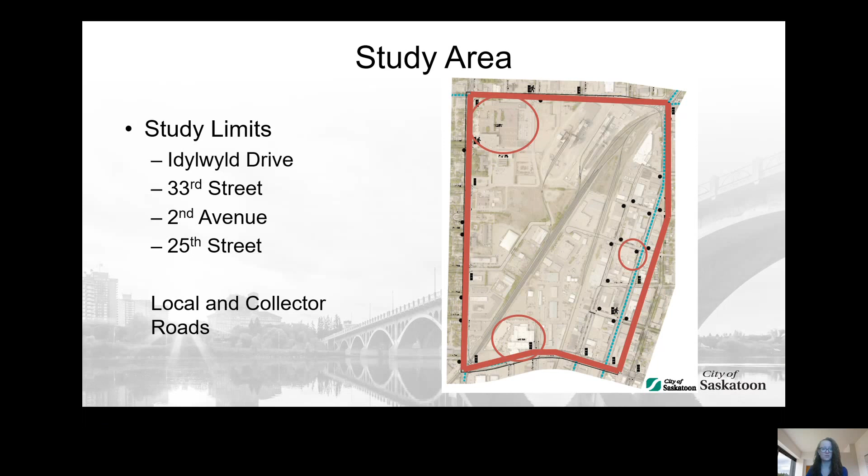In terms of our progress within the Neighborhood Traffic Review process, we have already completed stages 1 and 2, which involved identifying traffic problems within the neighborhood, collecting data, and developing a plan to address those problems. We are now in stage 3 of the schedule, which involves presenting our proposed solutions to the public in the form of a draft traffic plan.

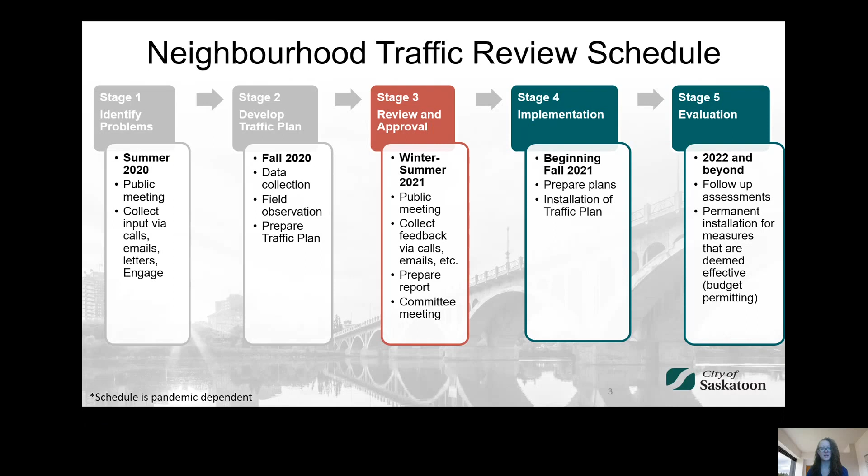This involves collecting feedback on that draft traffic plan, making any necessary changes or adjustments to the plan, preparing a report with the final traffic plan, and presenting the report to the Standing Policy Committee on Transportation. We anticipate that this stage of the schedule will be completed in the summer of 2021. I'll discuss the next steps in the schedule later in the presentation.

I'd now like to go over the concerns that we heard for this neighborhood. We heard concerns over the safety of pedestrian crossings at 1st Avenue and 26th Street, 2nd Avenue and King Street, 3rd Avenue and Duke Street, and 2nd Avenue and Princess Street.

We also heard some concerns regarding lowering the time restriction on street parking from 3 hours to 2 hours on the 700 block of 1st Avenue. Time restriction adjustments require a review of parking supply and demand. This request has been referred to Parking Services for their consideration.

After gathering all of these concerns from residents, we began our data collection program. Throughout the data collection process, we performed a number of site visits to gather field observations of pedestrian activity and traffic patterns, conducted pedestrian counts at 4 intersections in the neighborhood, and analyzed collision data for the neighborhood.

We used the results of our data collection program to create a draft traffic plan that recommends a number of changes and improvements within the neighborhood. In the next few slides, I will go over each of the recommendations in detail, but in general, we're proposing pedestrian safety improvements such as active pedestrian corridor, pedestrian activated signal, and sidewalks.

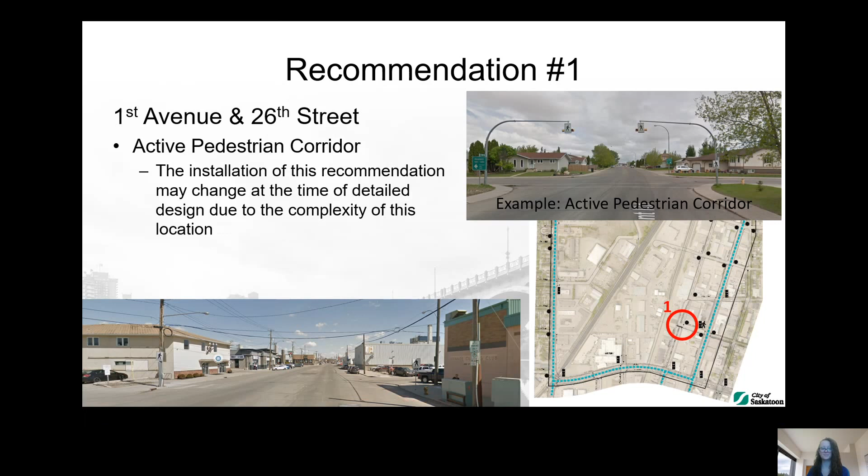The pedestrian crossings along 2nd Avenue/3rd Avenue were reviewed in a holistic way to ensure that the most used crossings were improved. Studies were conducted along 2nd Avenue/3rd Avenue at the intersections with Duke Street, Princess Street, and King Street. After reviewing the data, the following recommendations were made.

An active pedestrian corridor is recommended for the intersection of 3rd Avenue and Duke Street. Removal of the existing crosswalk is recommended at 2nd Avenue and Princess Street, and a pedestrian activated signal is recommended for the intersection of 2nd Avenue and King Street. These three recommendations all complement each other and were chosen due to the increased activity and spacing of the crossings at King Street and Duke Street. I'll go over these recommendations in additional detail.

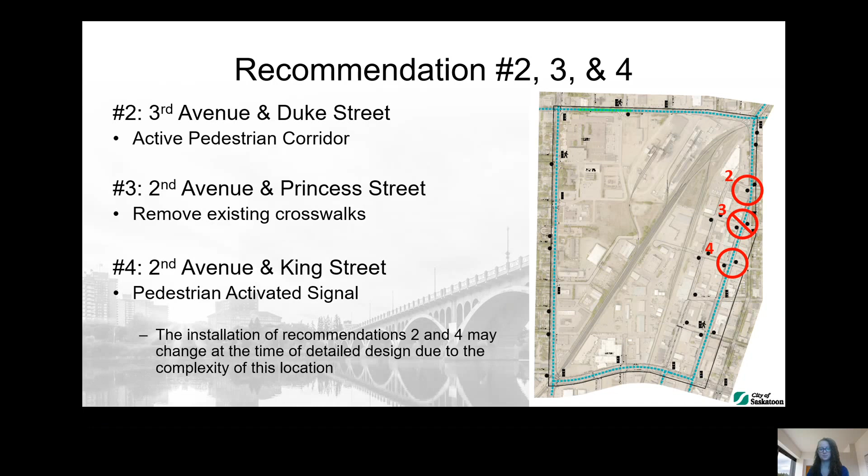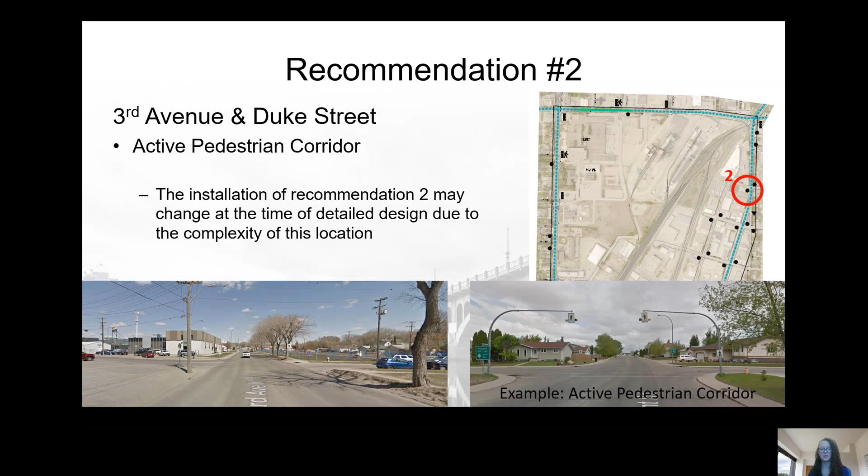Recommendation number 2 is to install an active pedestrian corridor, or APC, at the intersection of 3rd Avenue and Duke Street. There is a view of this intersection looking north at the bottom of the page. An example of what an APC installation looks like can now be seen on the right side of the screen. There is a possibility that the recommended improvement at this location may change once detailed design is undertaken due to utilities and trees in the area.

Recommendation number 3 is to remove the zebra crosswalk at the intersection of 2nd Avenue and Princess Street. With the upgrade to the crossings at the adjacent intersections, the zebra crosswalk will be removed. This crossing was the least used of the 3 intersections studied.

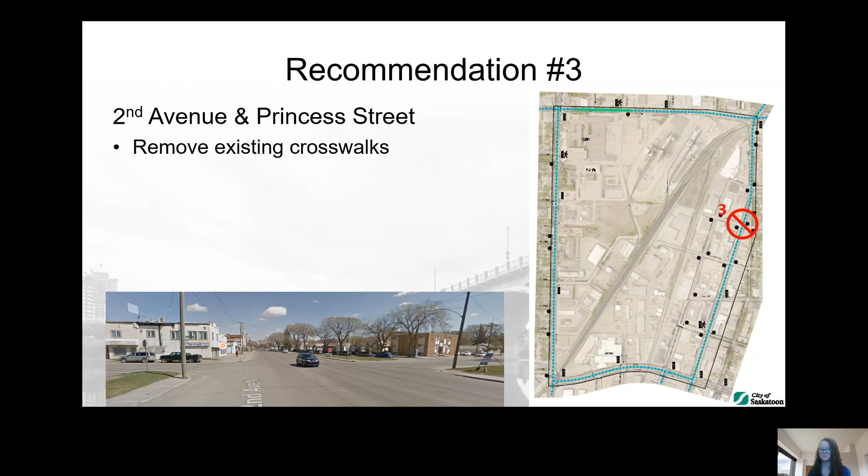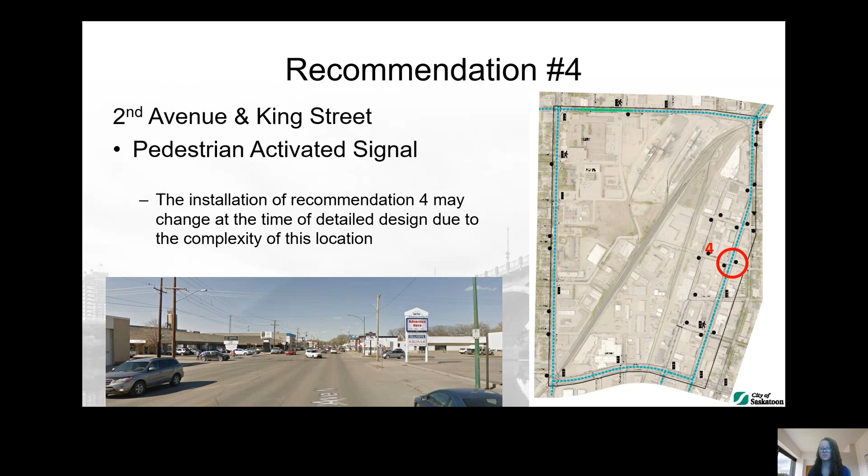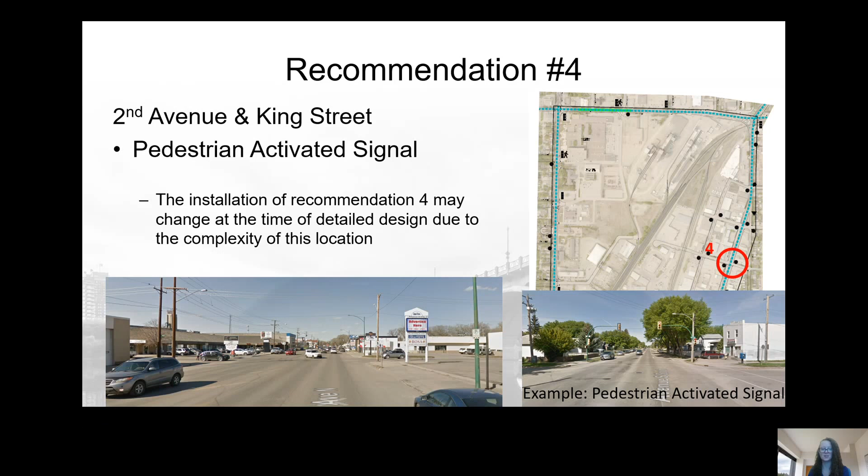Recommendation number 4 is to install a pedestrian activated signal, or PAS, at the intersection of 2nd Avenue and King Street. There is a view of this intersection looking north at the bottom of the page. An example of what a PAS installation looks like can now be seen on the right side of the screen. There is a possibility that the recommended improvement at this location may change once detailed design is undertaken due to utilities in the area.

A recommendation to install sidewalks and ramps as per the Sidewalk Infill program has also been made.

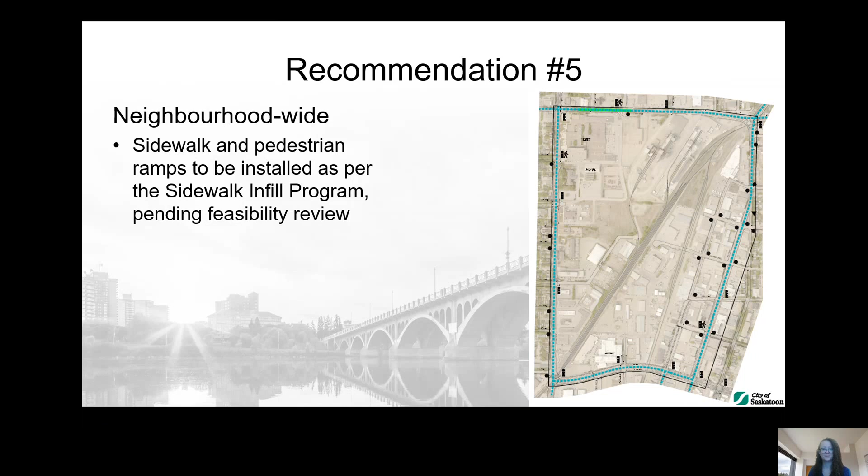The next step in stage 3 of the neighborhood traffic review process will be to collect feedback on these 5 recommendations. The comment period will be open for approximately 1 month until June 25th, 2021. Once that comment period has come to an end, we will finalize the traffic plan and prepare a report to present to the Standing Policy Committee on Transportation.

The next stage of the process involves the implementation of the traffic plan, which includes the preparation of plans and installation of the recommendations. Since these recommendations involve permanent pedestrian crossing devices, they will be added to the citywide list for these types of projects and installed as funding allows. Typically, these installations occur within approximately 5 years.

The evaluation stage includes follow-up assessments to determine the effectiveness of temporary traffic calming measures. Since there are no physical traffic calming measures recommended for this neighborhood, this stage does not apply.